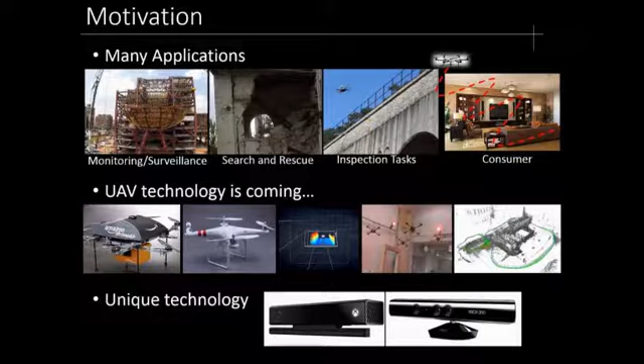Okay, so first, why would anybody want to work on quadrotor-related projects? So the first thing is that there are a lot of applications you can apply quadrotors to. So I've listed a few of them here across the top. So monitoring surveillance, that, as Mike mentioned in my intro, can be applied to construction site monitoring. And then you've got things like search and rescue, so sending a quadrotor into a building and trying to find somebody without the people going in.

You've got inspection tasks, so this is like bridges and tunnels, buildings. This is also kind of in line with my own interests as well. And lastly, consumer products. So I'm sure you're all familiar with several different consumer products that are drone related.

So beyond that, maybe why Microsoft or other companies would be interested in doing quadrotor things is because the technology's coming either way, right? So I've got some examples here. Amazon Prime, I'm sure everybody's familiar with their drone delivery project. The next one here is DJI, which is probably the most popular platform for taking handheld video. The third one is Google's Project Tango.

So a few of these are links, and I'll show you some videos as long as I have internet. So this Project Tango has actually been used to control a quadrotor. So I have a video, I can demonstrate that. The fourth one is actually acrobatic maneuvers with a quadrotor.

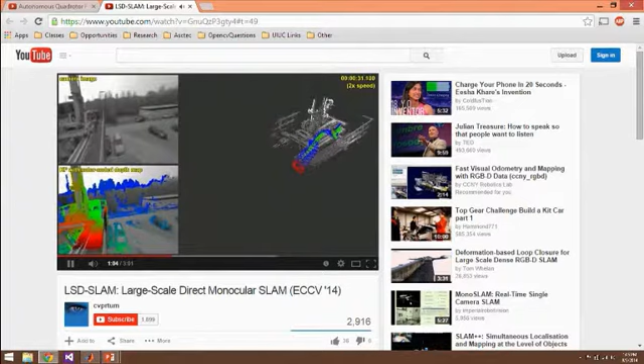Okay, so the other main one that I wanted to show then is the state-of-the-art in SLAM. So this is LSD SLAM, which was just recently published in ECCV. So what you're seeing here is the actual image and then their color-coded depth map, and then the mapping and localization step taking place in the environment on the right, where the red thing is the camera and the blue is the past cameras with the trajectory.

Okay, I'll stop it there. But so you can see that, I don't know how familiar you are with SLAM research, but it's come a long way, I would say. And this is running in real time at like 30 hertz as opposed to a 1 hertz SLAM system.

Okay, the other thing then that I wanted to point out, particularly perhaps for drone research here at Microsoft. So that's SLAM. The processing is done offline, right, or is it on drone? No, so they do that offline on a ground station, yeah. So first just collect the data and then, exactly, post hoc. Right, yeah.

Okay, so the one other thing that I wanted to point out as far as Microsoft is concerned is that there's unique technology here that could be leveraged for drone research that is just kind of waiting to be used. Of course, the Kinect sensors provide depth and RGB, which is kind of on the newer end of things.

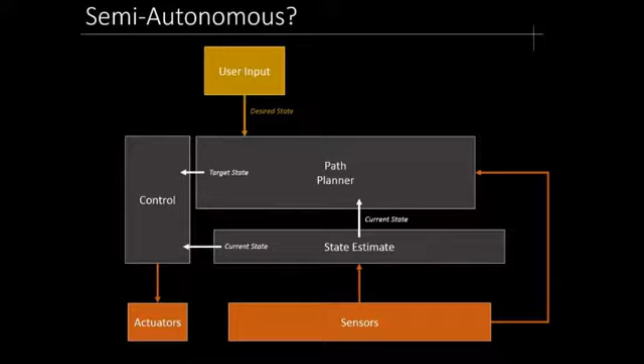So then the question is, how does the user fit into this so that you have semi-autonomy? So then you can imagine having user input go into the path planning component. So then the user provides the desired state, desired position in this case.

Okay. So what are some of the challenges of achieving this? So the first thing is ensuring safety. As I mentioned earlier, that can be anything from the safety of the house or the obstacles in the room to the safety of people. Obviously, you don't want to get hit by blades spinning.

So that's one challenge. An additional challenge, something that I brought up in the related work, is that localization and mapping is not a solved problem for GPS-denied environments. So being able to understand the room that you're in, particularly with dynamic objects, and then figure out where you're at in that room.

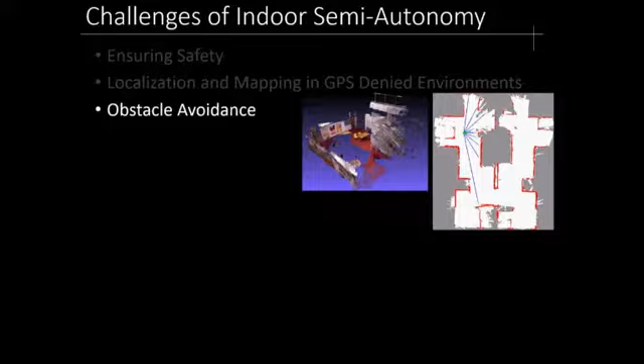Along those same lines then is obstacle avoidance. So once you see that there's something in the room, can you plan a path to avoid it? So this is also a topic of research, particularly in the robotics community, path planning and obstacle avoidance.

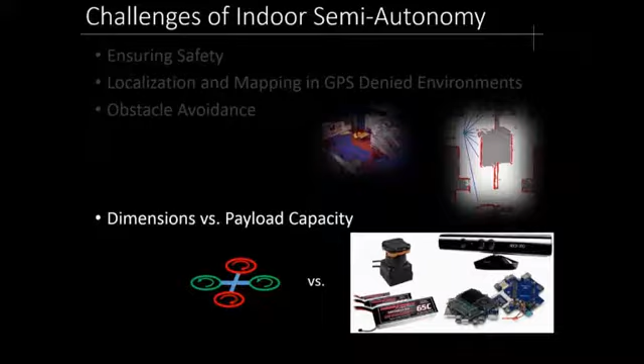Okay, so then another thing that is challenging is that there's a trade-off between the size dimensions of the quadrotor, the way it's built, and its payload capacity and/or the things that you can carry on board. So for example, here I've got LiDAR and Kinect, computer and batteries as examples of things that you need to be able to carry on board the quadrotor.

The other thing is that a bigger quadrotor requires more power, which means you have to have a bigger battery. So there's some sort of diminishing returns on making it bigger with a bigger battery.

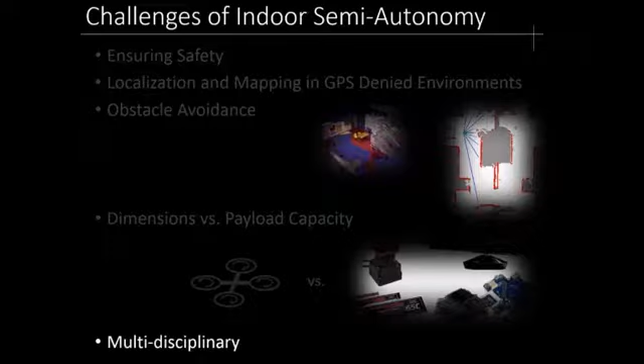And then lastly, this robotic system is inherently multidisciplinary. So you've got control theory, you've got robotics and path planning, you've got computer vision, aerospace engineering. Even when you get down to trying to debug Windows on your mastermind board, you've got electrical engineering as well. So it's just inherently a multidisciplinary problem, which can make it challenging to keep everything progressing forward.

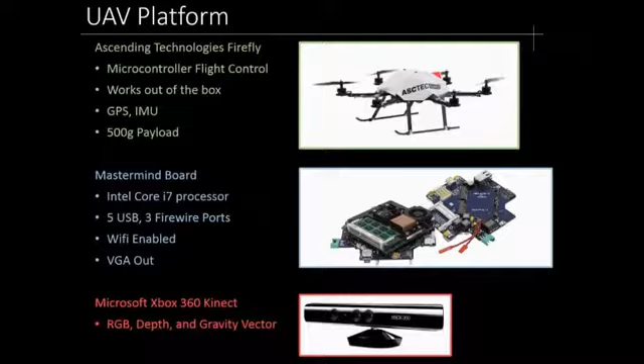Okay, so what platform did we choose for this problem? As you may have noticed right here, this is the Ascending Technologies Firefly. So just a few things worth mentioning about the Firefly. It has a microcontroller flight controller on board. It came on there, and so with that, it works out of the box. So we have flown it manually outside several times to make sure everything's working properly.

It's also got GPS, so we flew it using the GPS. I'm sure some of you have flown other ones with GPS, so it works very similar to a DJI, for example. It's also got an inertial measurement unit, or an IMU, which provides accelerations in X, Y, and Z, and velocities in roll, pitch, and yaw. And finally, it has a 500-gram payload, which is more than enough to carry a Kinect, a battery, and the mastermind board.

So then the next thing is we have a mastermind board on it. It's a proprietary board developed by Ascending Technologies that has an Intel Core i7 processor on it. It's got USB ports, FireWire ports, serial ports, etc., so you can connect any sort of device that you want to it for interfacing. It's got Wi-Fi and it's got VGA out, which is nice because you can plug a monitor into this board and then work right on it.

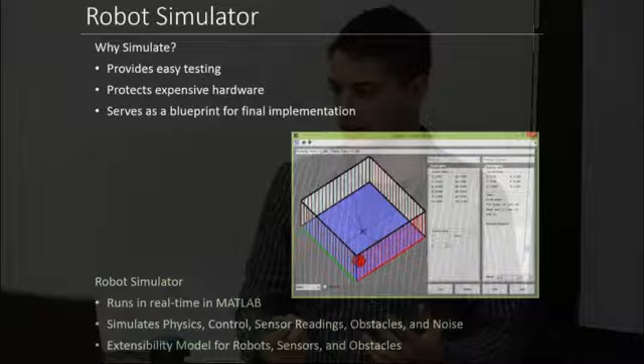Okay. So one other thing, I spent a long time this summer working on a robot simulator. It's for the Firefly, but it can also be used for any other sort of robot that you would want to add to this system. So why simulate? The first thing is it provides easy testing and validation of your algorithms, so control algorithms, vision algorithms, etc. The next thing is that it protects the expensive hardware. You don't really want to design a new controller and then just put it on it and hit go and see what happens. So having a simulator allows you to test your theories first before you try them on real hardware.

The other thing is that it serves as a blueprint for final implementation. Basically, with the simulator that I have working, you can essentially port it from MATLAB to C, and then you should be able to go. There are, of course, a few caveats to that, but some of that stuff has already been taken care of in terms of visual odometry, which I'll talk about later. In terms of the actual simulator, that's a picture of it, and I'll show a demo of it later.

Just a few key points. As I mentioned earlier, there's an extensibility model for robots, sensors, and obstacles. I made this with hopes that it can be used with things besides just the quadrotor. So all you really need to do is follow my template, implement 4 functions, add it to the engine, and it will run. So this is physics, control, draw, and 1 other one, and then it'll just work.

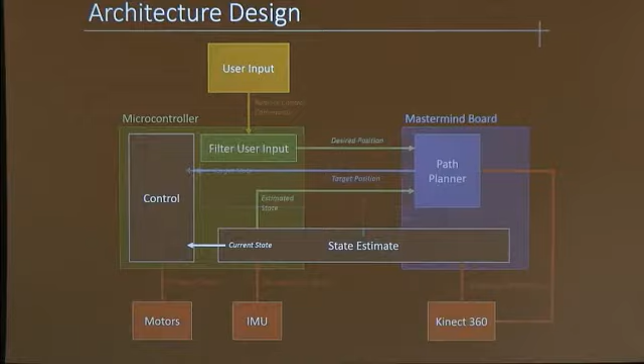Okay, so the next thing is we're going to replace the path planner part. So the first thing that we're doing here is that we're taking the user input, which is remote control commands, and we're going to filter that user input into what we're going to call desired position, or where the person wants the quadrotor to go. That's going to enter the path planner, which will be running on the mastermind board.

In addition, the path planner will be receiving the point cloud data because it needs to be able to avoid obstacles. It will be receiving an estimated state, so where the quadrotor thinks it's at currently, and then it will be outputting a target position. So the desired position is where the user wants it to go, but what if the user controls it to go too close to the wall? Then the path planner will push it back away from the wall to protect it. So then that will be the target position that the controller will use.

Okay, so then the next part is that we want to take the Kinect data and provide an estimated pose, which we can use for our state estimate. So the first thing here is that you'll see the Kinect 360 RGBD image is going into the RGBD visual odometry component. That's going to output an estimate of pose, or 6-degree of freedom pose, so roll, pitch, yaw, XYZ, to an extended Kalman filter. The extended Kalman filter is used as a method of data fusion, so we can estimate the state even though the IMU and the odometry are providing data at different rates. And then lastly, the estimated state goes up and into control.

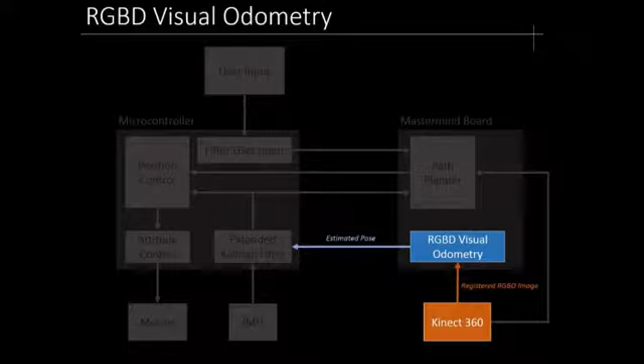Okay, so now I'm going to go through each component in more detail, one at a time. The first one is the RGBD visual odometry. Again, we're passing in registered RGBD images and we're outputting estimated pose. So this is the method that we used. We started with a 2D feature tracker, and specifically we were using Harris corners with BRIEF descriptors.

So then using the key points, we're using a 3-point algorithm inside of a RANSAC loop. RANSAC is random sample consensus. Basically you take the minimum number of points that you need to solve a model, and then you see how many other points fit that model, and those become your inliers. Then you sample the minimum number of points again, you do this iteratively, and you keep whichever model had the most inliers.

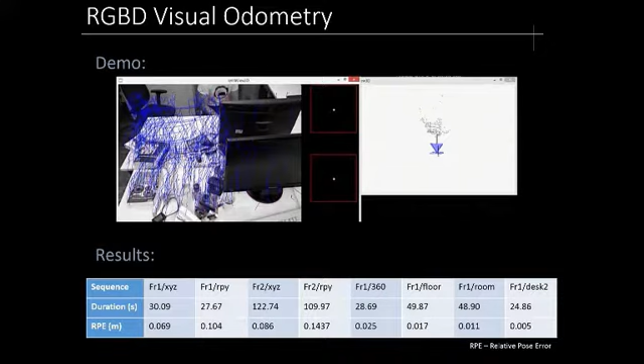From the depth map, right? Yeah. I thought they were triangulated. Well, there are other ways of doing pose estimation where you only use 2D images, for example. Since we had the Kinect, we chose this method because it makes sense for having the depth data.

So the only other thing that I wanted to mention here, I added this to the slide because for us, we weren't necessarily trying to compete with the state of the art as much as get a working system. So the relative pose error on various data sets was a way of verifying that we indeed had a system that was working. So I didn't want to focus too much on that, just state our intentions.

Okay, so the next thing then is, if you remember, we just left the RGBD visual odometry step, and we're passing the estimated pose now into the extended Kalman filter. And similarly, we're passing the IMU readings into the extended Kalman filter. And what we're hoping to get out is an estimate of state. As I mentioned earlier, the idea behind a Kalman filter is that we're fusing sensor measurements into a state estimate. So this diagram is supposed to represent how this works.

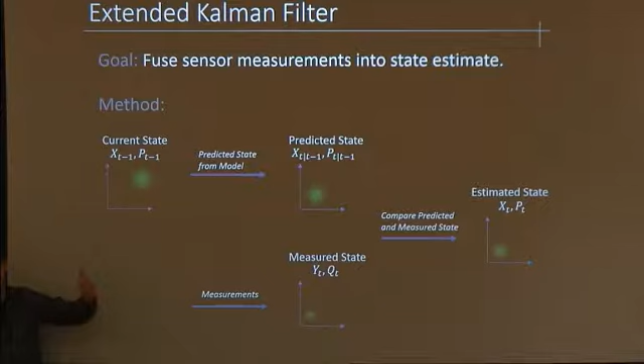So we know that we had all 4 motors thrusting upward, so we expect Z to be up some amount from our current state. Then we have readings coming in from our sensors that tell us we moved up by some amount, and then you fuse them together to get your final estimate.

Can there be a gap in measurements? Can you be disconnected from the IMU in some sense, and signal drops and then comes back?

Yeah, it's just that. So your covariance will just grow, right? You become more and more uncertain about your actual position, essentially. You need the measurements here in order to regain certainty. If that makes any sense.

So if you know that you're at x equals 1, y equals 1, z equals 1, because your pose is telling you that and you're applying control inputs that tell you that, then suddenly your pose is gone. So your variance on, well, I think I'm at 1, 1, 1, but I'm getting less and less sure every time I iterate, because my pose isn't telling me anything about it anymore.

How do you deal with the different sampling rates for the two channels, like IMU, are they coming at the same frequency? Are you forcing them to sort of sync? They're not. So like I was saying, IMU normally will give you data at, let's say, a lower bound of 500 hertz, and your visual odometry is definitely not that fast. Yeah, it's 20 hertz. So do you interpolate? What do you do?

So there's actually different methods to do it. I have a PDF on how to do this, but I'm not qualified to give you a 100% accurate answer. I haven't completed this part 100% yet.

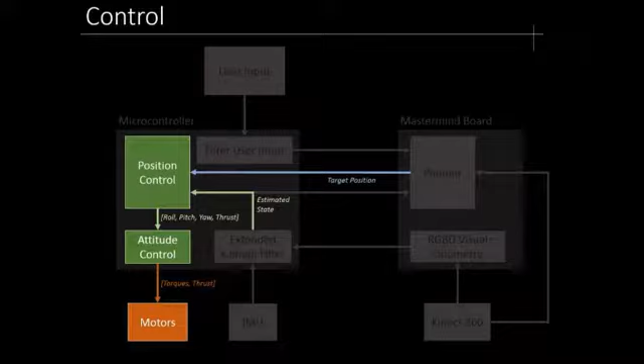So, out of the path planning component comes the target position. And the final step is to take our current estimated state and our target position where we want to go, and control the motors to get us there.

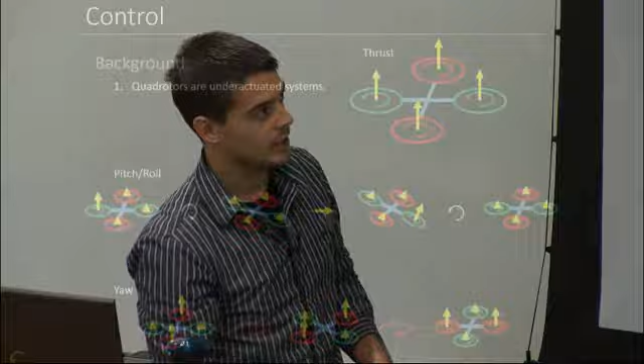Before I do that, let me give a little background in case people aren't completely familiar with the dynamics of a quadrotor. In control theory, a system like a quadrotor is considered an under-actuated system, meaning there are fewer actuators than degrees of freedom. The quadrotor has 6 degrees of freedom, and we have 4 motors.

The way that you achieve the different motions is depicted in these different drawings. The first one is thrust. If you want to move upward, you increase the thrust equally of all 4 motors and you move upward. Similarly, if you want to move downward, you decrease it, as you fight gravity.

The more interesting cases: the spinning of the rotor causes a moment. The reason I have red and green for opposite motors is because the green ones are spinning counterclockwise and the red ones are spinning clockwise, so the moments induced by the motors cancel each other out and you don't constantly rotate. If, for example, all 4 motors were spinning clockwise, you would have a moment always yawing you.

By having canceling moments, you don't have that problem. So we'll skip to yaw since I'm already talking about it. If you want to yaw, you want to keep the motors balanced so you maintain the same height, but you increase the motors that correspond to the way you want to yaw, and you'll induce a moment that will yaw you. So what you're seeing here is I increase the red motor speed, which induces a clockwise yaw.

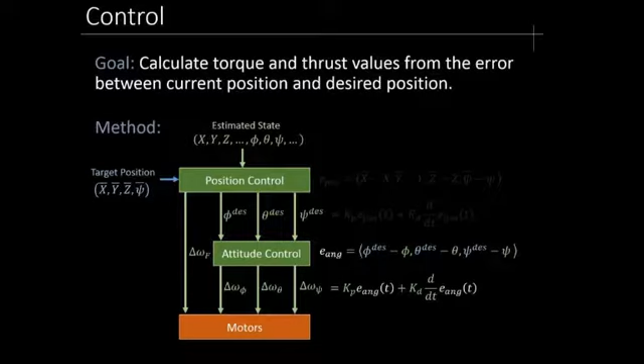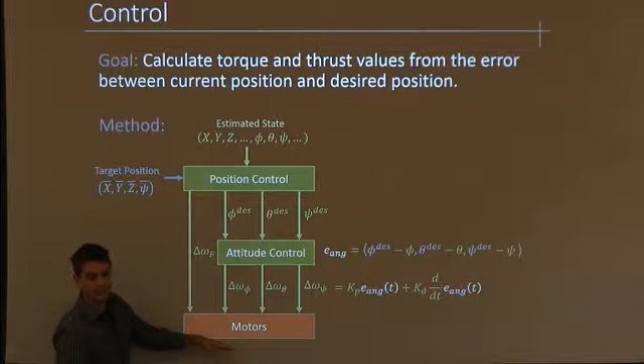Okay, so then the second part is the attitude control. In the attitude control, we're looking at our errors in angles. We have desired roll, pitch, and yaw that we got from the position step, and we're subtracting the roll, pitch, and yaw from our estimated state to get some error in angle. We're doing another PD control loop to get desired torques - torque that changes roll, torque that changes pitch, and torque that changes yaw, which we then feed into our motor dynamics and our motors.

Why are you using a PD instead of PID? The I component fixes a steady state error. So if I'm supposed to walk all the way to the wall and touch it, but PD gets me like 80% there, the integral part will push me to the wall. But for a system where a user is controlling it, the user can make up for the steady state error on his own - it's not as important.

Do you think the I component would induce an oscillation that you don't want? It can cause instability, yes. You don't want that, so it's not worth the pain and suffering, I guess, to mess with it at the moment.

Okay, so we've gone through all the aspects of the system. Now I guess I'll run quickly through the simulator and then conclude, because it looks like I'm running out of time.

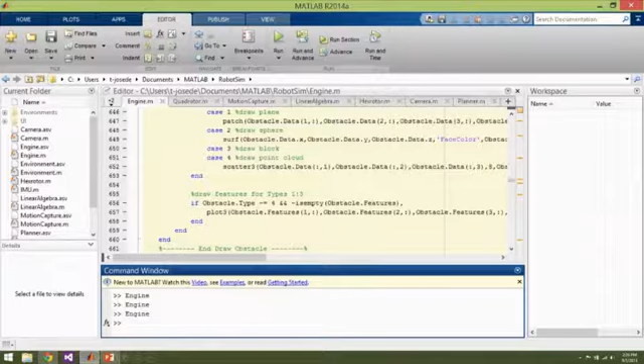Oh boy, is it gonna fit? Okay. So let's see. I'll put it on manual so that I can control it with this. So I'm going to control it with this guy. So the first thing I'm going to do is just show basically a validation of the control.

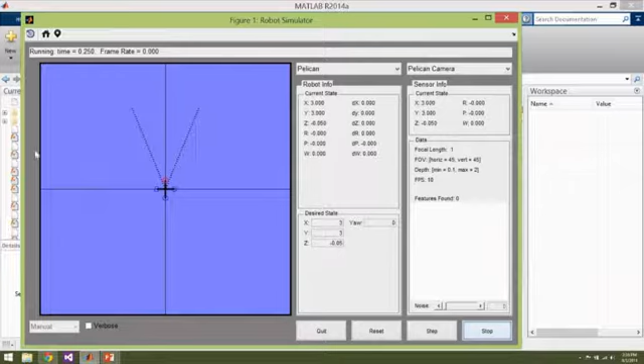So this is the quadrotor in the environment. On the left here, you're seeing the current state. I can change the desired state. So for example, if I change it to -2, the quadrotor will thrust upward. While it's doing that, on the right side, I have sensor information. So this is the current state of the sensor. It's on the quadrotor, so it'll match the quadrotor state.

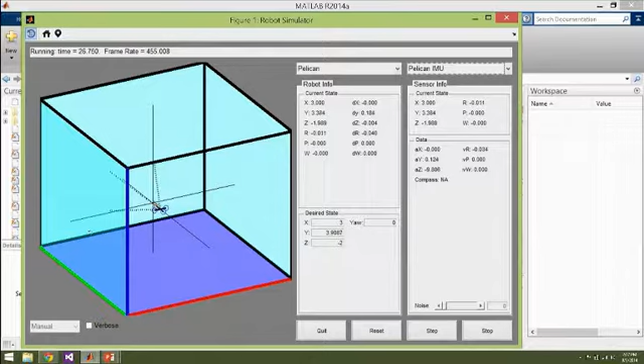And then just some information about the camera. I don't have the features in the scene yet, but I will eventually, so I'll show that later. And then similarly, there's an IMU. Okay, so... pixelated looking on this screen.

So let's see. I guess an interesting vantage point of the actual way the control works would be something like this. So you'd expect it to pitch backward as it moves. And you can also see how I'm doing tiny little steps, right? Because it pitches and moves, and then pitches and moves, and then pitches and moves.

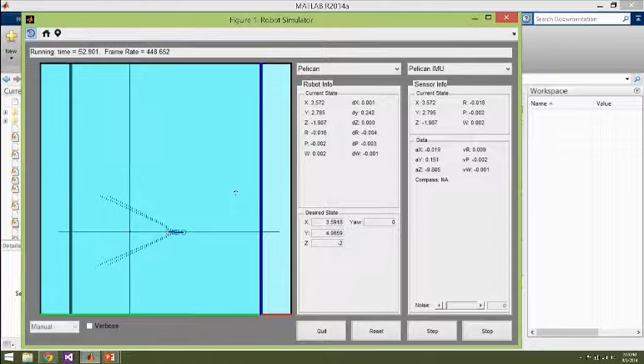Oh no, this is purely a control part. I have a separate thing for that, yeah. I was just more interested in demonstrating the control first. Will this demonstrate obstacle avoidance and not hit the wall? No, not in manual mode. Oh, you're in manual. Okay. Yeah. So yeah, I mean that's it, right?

Do you know if the MATLAB code depends on infinite numeric precision? I don't think it does. If it did, it wouldn't work, right? Well, no, it would work in MATLAB, but not in C#. I see what you're saying. That's what I'm worried about in the port. There's one part, well, maybe two, I don't know. You can address them. The components you were dependent on in MATLAB that would need to be addressed.

Yeah, but in terms of infinite precision, if you have an error, the controller should be robust enough to deal with tiny errors, numerical errors, I would say. So I don't think that should be a problem. So let's see, what was I going to do? Let me just do one thing real quick.

For the second one, how do you verify this translates to the real world correctly? Is there a way to verify this? I don't think Joe's gotten that far. So I mean, it's never going to match perfectly. But you can add noise. So I have the capability of adding noise.

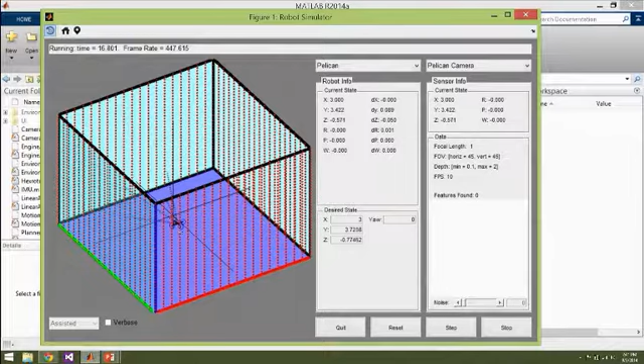All right, it moves a lot slower in assisted mode, so I'm going to start increasing the Z. So now there are feature points in the scene. So if I start moving... Yeah, if anyone has questions, now's a good time to ask. Just to clarify, what's slow, the rendering code? Yeah, when I start adding features, the scatter points, stuff like that.

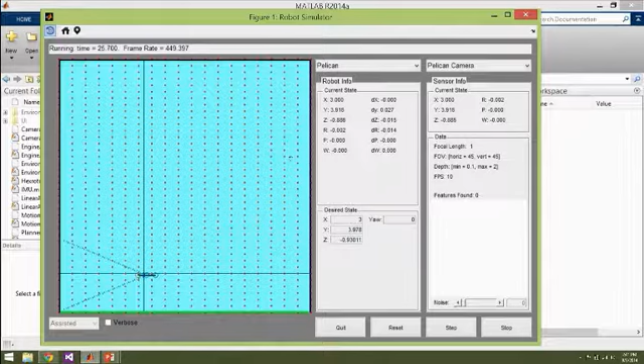Actually, I was going to ask about performance from another angle, which is it'd be great to have a GPU implementation of your path planning. Well, so I'll discuss some improved path planning ideas that we have, just briefly, because it's something that I would like to do but didn't have the time. So the thing is, these point clouds get updated when you get a new keyframe, right?

So the concern is that your mean position, the obstacle mean, is going to jitter around or shift around as you change. So you're probably going to smooth it out. Yeah. So actually the mean is just a proxy. It's not a good method really. In the presentation it was just, I would say, a placeholder. You would want to take the closest point in the point cloud. Right. That's the most conservative thing.

Ideally, you would want some geometric simplification. It depends: if you went to Caltech, then you do the closest point. If you went to some other university, you might do average. Yeah, but average is bad because you could have a fence, and then the fence would be invisible to the environment. Right. I think we should treat it as a random variable.

Just very simple segmentation based on depth discontinuity, and then fit planes to objects. Yeah. So kind of the reason I didn't want to fit planes to things is it can be expensive. Any of these points where you come up with a single estimate will have this jitter. Like mean is one parameterization, right? So I think the right way to deal with it is as a random variable, right?

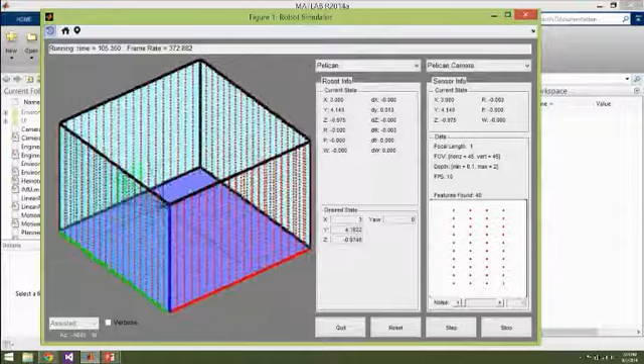So what are we seeing here, Joe? Oh yeah. So let me rotate it real quick. So you can see the points the camera is capturing, and then you can see them rendered on the screen right there. So for example, if I... you can see the sort of jitter of the points induced by the quadrotor pitching forward as I slide forward.

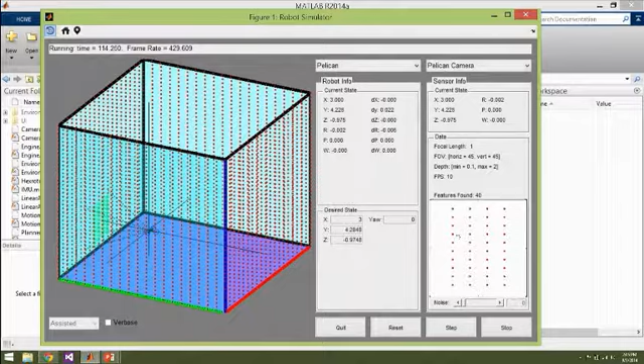Ever so slightly. It's a little hard to see. It's just flying super slow, right? The feature points are on the planes. Or it's rendering super slow. Yes. And they turn green when the camera can see them, and then they show up over here. Right. And then, does this include the part where you're changing the desired position, taking into account the wall?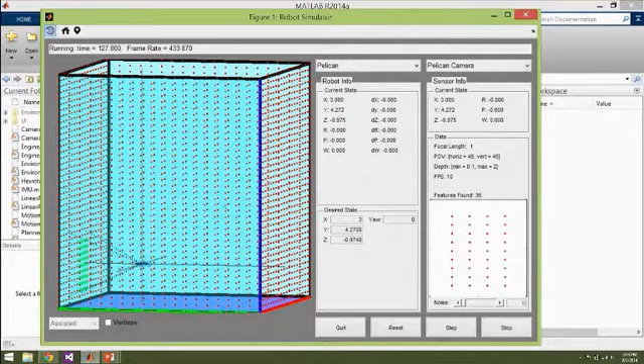Yeah, but it's gonna take a long time. It wasn't working right the last time I tried it. I started hacking this apart in the last 2 days, and I screwed something up. That's what I was telling you. I suspect that it will go unstable here.

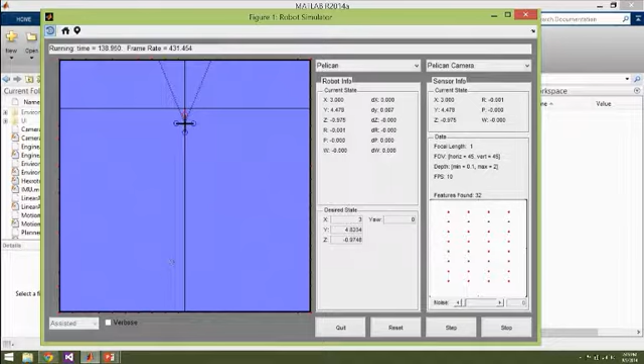Did you guys think about proximity sensors or even cheap laser rangefinders? You can put a rangefinder on that. Yeah. I mean, even Ascending Technologies sells one, but I think that we wanted to try and use Microsoft's technology. I think this gives you a lot more flexibility, on top of just an additional sensor.

Well, one of the things I mentioned was having an IR sensor pointing up and down at least, some sort of depth sensor. At the moment I allow you to thrust up and down, but really you need something there to make sure you don't hit the ceiling or the ground. But you don't need the resolution that a Kinect gives you, assuming that we're in normal rooms.

I think the key to the use of the Kinect was the visual odometry part, using it with the IMU, because knowing where you are is one of the biggest problems. But then the obstacle avoidance piece, having that depth map, basically allowed us to use that sensor for two different things.

What's your estimate? How fast can you go with this algorithm, what's the upper bound? Frame rate? Not frame rate, the velocity. I mean, it would be up to tweaking that alpha parameter. Ballpark number, what do you think? Oh, you mean how fast can I go before it starts to go crazy? Yeah. I don't know, a meter per second. That seems really fast. Maybe less than that. I don't know.